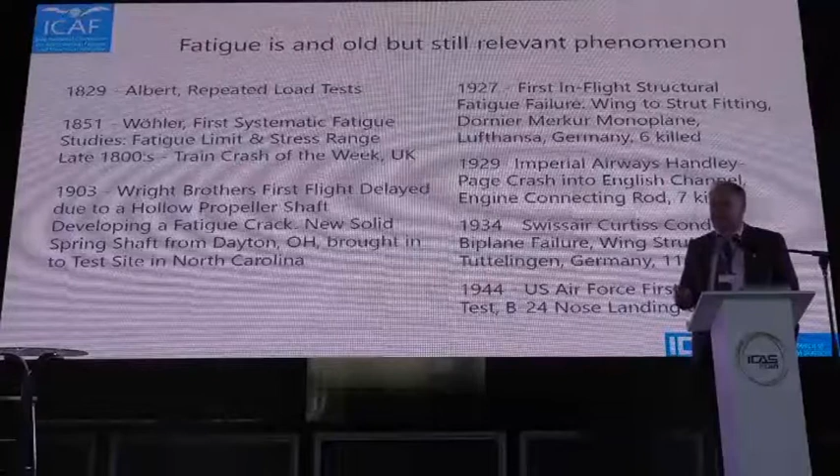On the right-hand side, you see a number of failures. The first in-flight structural fatigue failure occurred back in 1927, and after that, lots and lots of failures occurred. In 1944, the first US Air Force fatigue test was done.

A very famous failure occurred in the early 50s by this plane, which was the first serious jet operating at high pressure, so it could fly at high altitude. Therefore, it had a number of unique features, such as twice the internal pressure compared to any other plane at the time. This particular one, called Yoke Peter, was delivered in '52, and about 2 years afterwards, it failed and fell down. It was flying from Singapore to London, had landed in Rome, and then crashed outside the island of Elba at about 150 meters.

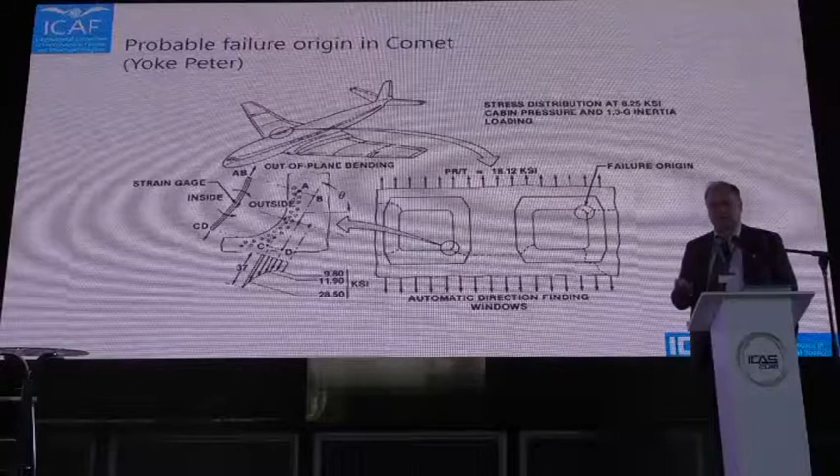Then they tried to recover the pieces from the first failure and started to do fatigue tests. It was soon realized that fatigue cracks did happen, and they came at the corner on this window, which was used at this time to navigate after the stars at night. So basically it was understood already at this time that cracks initiated due to the new very high pressure and stress concentrations. Later on, it has also been explained that there was lots of secondary out-of-plane bending due to curvature of the fuselage, which added to that. So the main effect here was basically to realize the importance of stress concentrations.

Early on, a number of important contributions to our field were the development of the closed loop servohydraulic test system. That's the best we have, the full-scale fatigue test. A little bit similar to the wind tunnels in the aerodynamics community.

Fracture mechanics started to be used in the 60s and 70s to model fatigue crack growth. It's interesting to note that the first paper by Paul Paris was rejected in 3 leading journals. The reason was that people felt there is no way that a phenomenon like fatigue crack growth, which includes material separation and therefore plastic deformation, could be modeled by a linear elastic fracture mechanics parameter.

However, now it's very well understood that as long as we have what is called small-scale yielding, which we normally have at the lifetimes we operate, the stress field at the crack tip is characterized by the first term in the series expansion. This is called the stress intensity factor, and it has an inverse square root singularity. So the stress goes to infinity at the crack tip, but of course yielding will stop the stress from becoming infinite. The good thing is that it's not dependent on planar geometry, so we can transfer data from test specimens in the lab to the structural calculations we do for real aircraft.

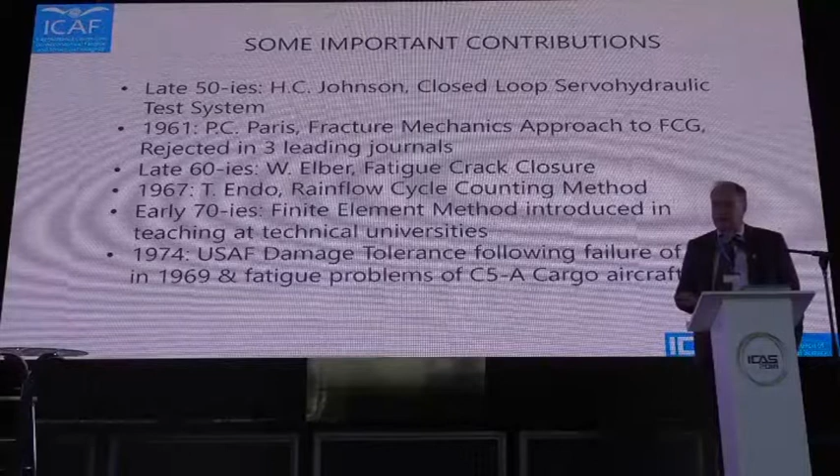Finite element methods started to be used in the early 70s, and they are our bread and butter today to analyze stresses. In 1974, the US Air Force introduced the damage tolerance concept following two failures of the F-111 in '69 and fatigue problems of the C-5A cargo aircraft.

I will only show the F-111 here. Originally it was designed for a service life of 4,000 hours and equally many flights, but failure occurred after only 105 hours. This happened on a low bombing mission, occurring at only 3.5 Gs, which is roughly half the design limit, so the stresses weren't that big.

And the reason, of course, you can see down on the lower corner here—sorry, I can't get this right. You see, on the right-hand side, you have an initial flaw prevalent in this steel. It's a D6 steel, already at the beginning roughly 1 inch long. This particular steel is very sensitive to small cracking, so failure occurred very fast.

Eventually, the problem was sorted out, and they did 4 fatigue lives and resumed safe flying. But each and every aircraft had to be tested at minus 40 Fahrenheit before flying, due to the sensitivity to very small flaws. Very expensive.

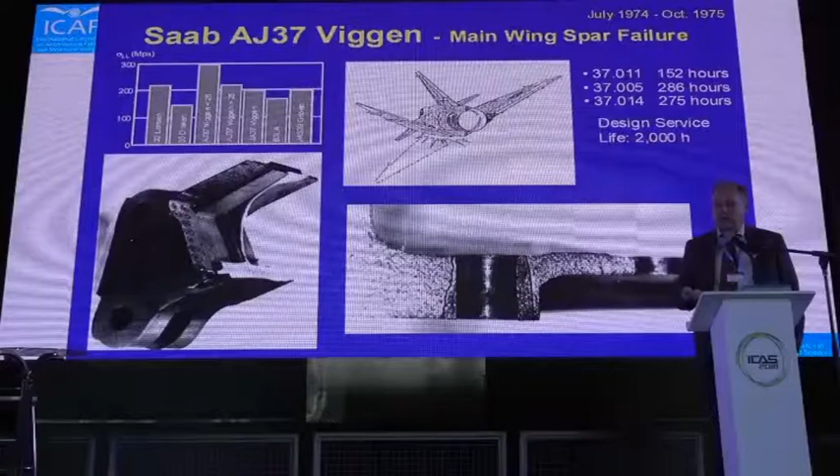We had failures in Sweden also at about this time. These were due to logistical problems—a hole was drilled very close to a free edge, and this was not forwarded back to the stress office. Very simple to analyze when you know, but it's a logistical error.

Another one happened in the late 70s. It's a Boeing 707, which crashed upon landing at Lusaka Airport in Zambia. The design service life here is 60,000 hours, and as you can see, it failed much earlier.

This design is quite interesting. It's only the upper and lower chord which are carrying load. The middle part is a fail-safe design. Normally it doesn't take any load, but once one or the other breaks, the center part can take load, so it's supposed to be a safe, fail-safe design. However, the cracking occurred in such a way that it was not possible to inspect before failure. So what we learned here is that even if you design for crack growth, you must have inspectability.

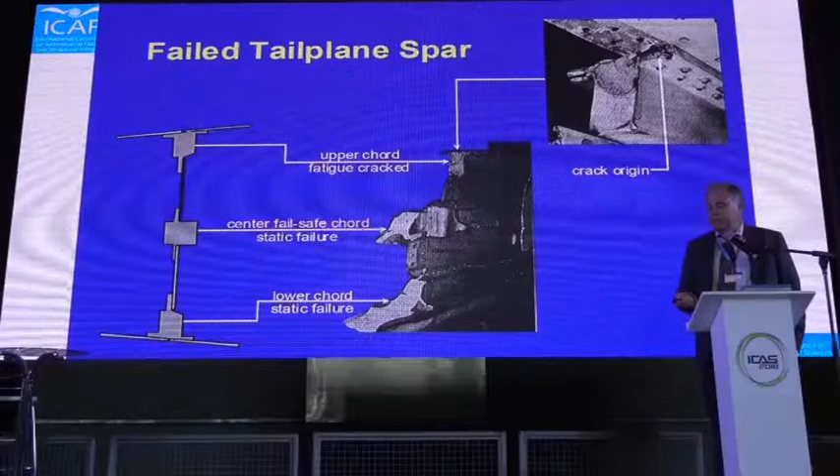In the 80s, which is probably the most important decade in terms of structural integrity growth, there was tremendously good funding available in most countries in the world. We could do lots of basic research in fracture mechanics, fatigue crack growth studies on mechanisms, things like heat treatment, where you change dislocation structure to get planar or wavy slip and so forth.

We did lots of work, especially in Europe, on producing standardized load sequences. Falstaff simulates the loading on a fighter wing, Twist similar for a transport wing, the connection to the fuselage. Helix and Felix are helicopter load spectra. Enstaff is the same as Falstaff with environmental conditions involved to test composites. Carlos is for the car industry. These sequences were produced to make it possible to exchange data around different laboratories, because load sequences typically are classified, so you can't easily exchange data otherwise. I think this is still a very good concept.

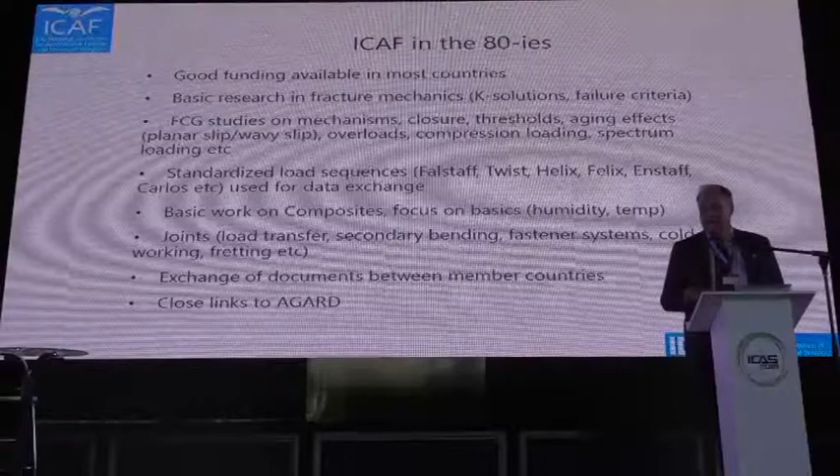We worked very much on composites then, focused on very basic things like the influence of humidity and temperature. Lots of work on joints. This is still very relevant. Joints are one of the more difficult things to design, especially when you have combined metal and composite structure. At that time, we had very close links to what is called AGARD, that was NATO's research and development group at that time. It still exists in a different format, not as successful, I think.

The next failure I want to show happened in Japan. A Boeing 747 crashed because the bulkhead cracked, and you got pressure which tore off the fin and the horizontal tail plane, therefore tearing away all the hydraulic control system.

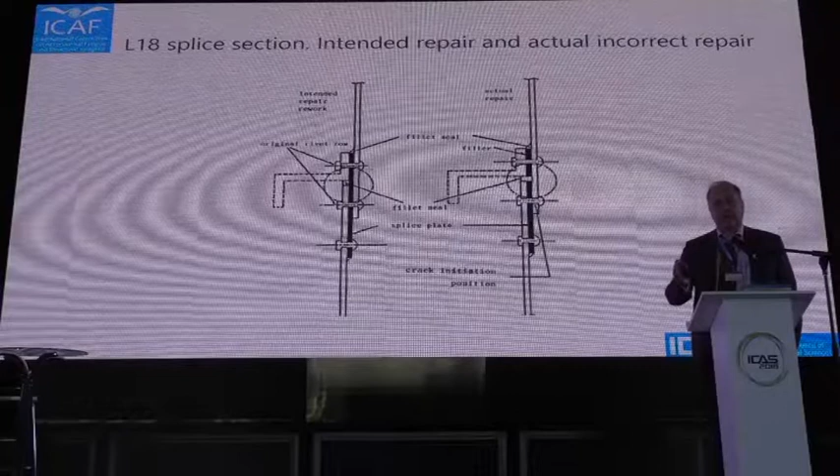The reason for this was that the plane had previously had a very bad landing, introducing damage in this bulkhead. So it was repaired according to what were correct regulations. However, the repair did not occur in the right way. The left-hand side shows what it should have been, the right-hand side shows the actual repair. What happened was a mistake in the middle part, hard to see here, such that you only have one rivet line carrying load in reality, whereas it should have been 2 rivet lines.

So here you see that these 2 bays now, because of the poor repair, have only one single row of rivets, and that has less than 70% load capacity than before.

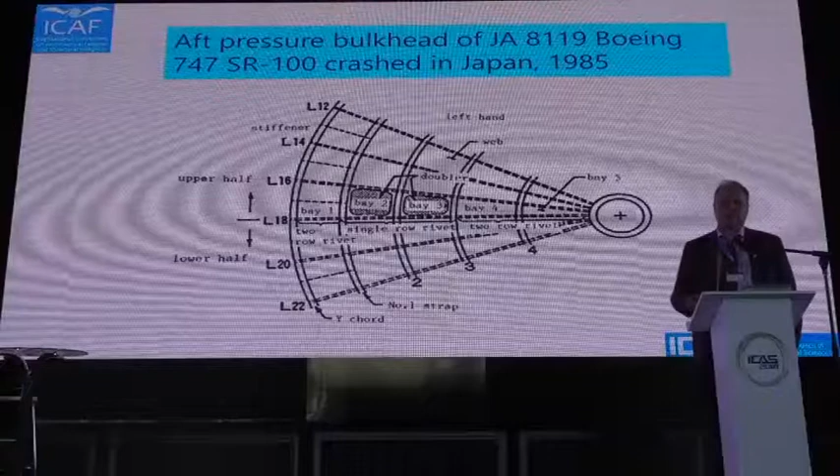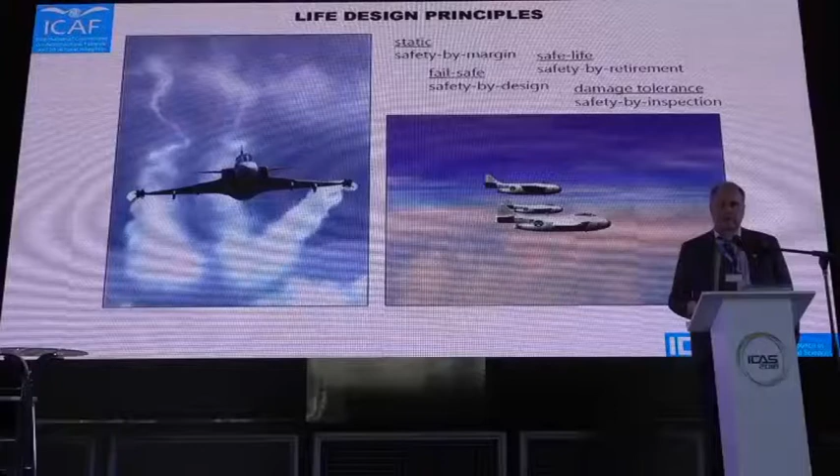Then we went to fail safe, which is safety by design, which is quite tricky. It's now part of damage tolerance design rules, which are really based on safety by inspection. All civil aircraft today are designed for this. Military aircraft, as far as I know, still only in the United States and Sweden.

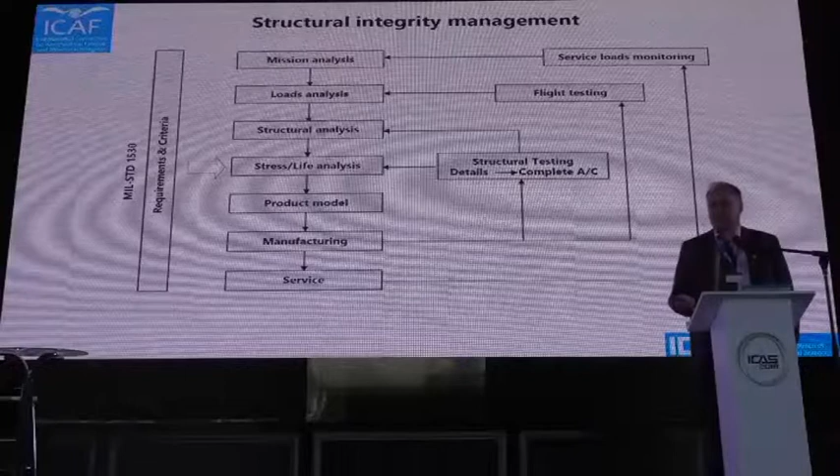Then I have loops. The inner loop is structural testing from details up to complete aircraft. At the same time, we have flight testing, making sure that the initial load assumptions were correct. If they are not, you have to go back and redo the stress analysis, which will influence the test aircraft. And finally, we monitor loads on each and every plane, of course, such that we can optimize the usage, different pilots, mission mix, and so on.

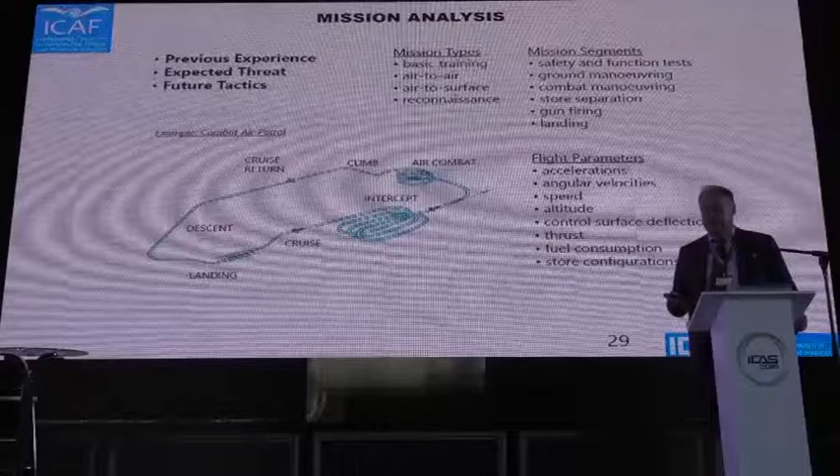So, very quickly, what is involved in mission analysis is clearly previous experience, the expected threat, future tactics. This is for fighter aircraft, of course. Various mission types today, lots of new planes are changing mission types. You have mixed fleets, so you do both reconnaissance, air-to-surface attack, fighter roles, and so on.

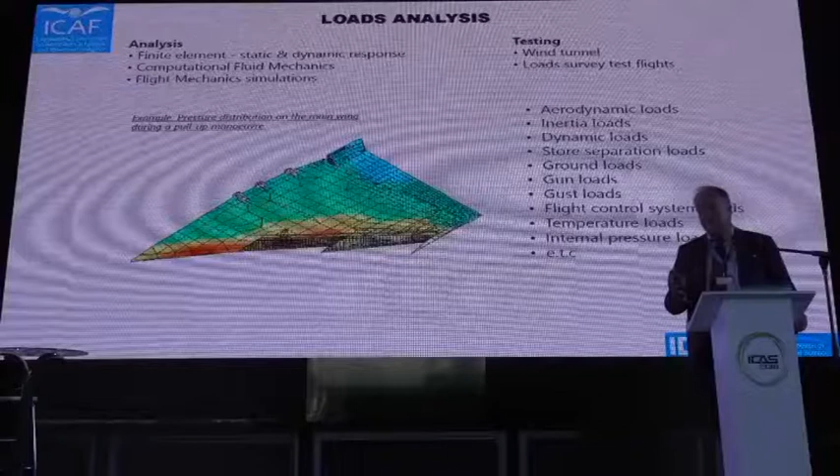When it comes to civil aircraft, the ground-air-ground cycle is very dominant, and we typically design for 60 to 100,000 flight hours or so. For fighter aircraft, the maneuver loads typically dominate the fatigue life, and therefore we have much larger stresses, and lives are in the order of 1/10 of civil aircraft, 6 to 10,000 flight hours or so.

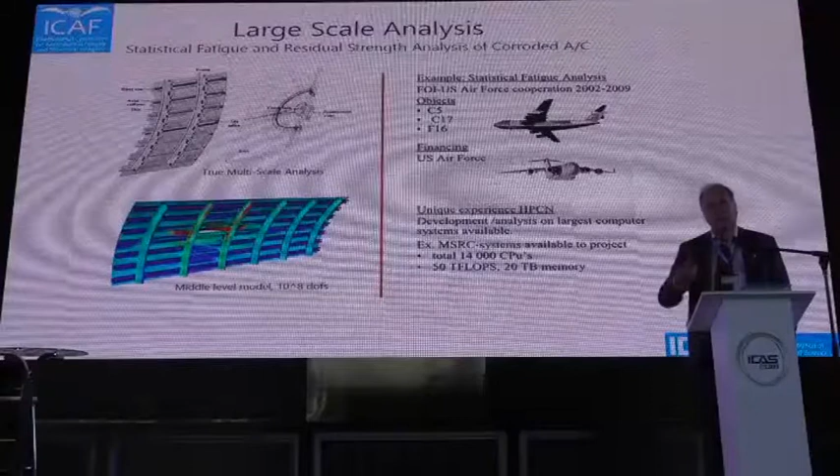I would say that in the commercial world, it's very hard today to compute more than about 100 million degrees of freedom, because the computational codes do not scale with the number of computers. If you do three-dimensional p-version finite elements, you can actually scale this. So we have in fact done what I believe are the largest real computations, up to 7 billion degrees of freedom in statistical modeling. Very complicated, but you can do this extremely well today.

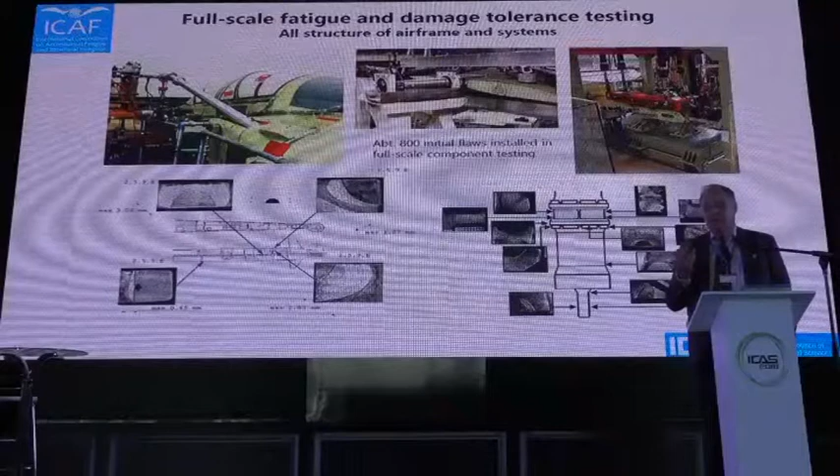Full-scale fatigue and damage tolerance is done for each and every new aircraft. Typically, you do full 2 fatigue lives first, then you introduce flaws at critical locations and do up to 2 more lives, and then eventually residual strength tests.

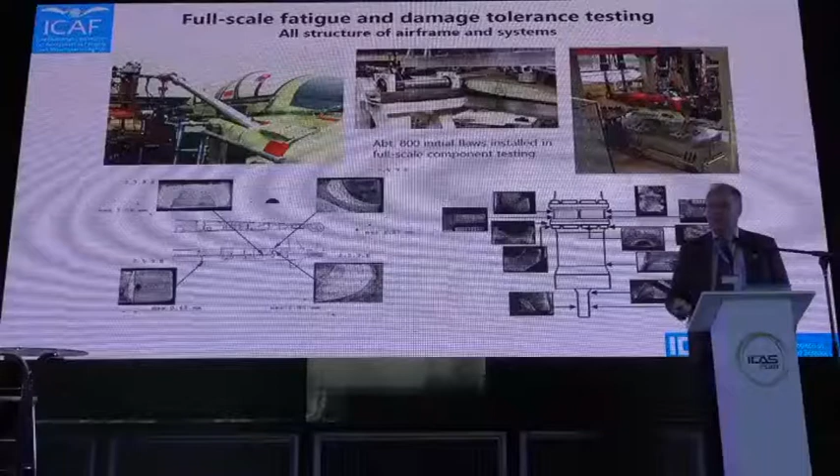This shows work in Sweden for the Gripen aircraft, where you see that about 800 initial flaws were installed in critical locations, and a full-scale test can look like this, typically with 120, 140 load actuators. It goes on for many, many years, and you always want this test to be far ahead the fleet leader out in service, such that we will discover any possible new mechanisms occurring due to design changes or new materials.

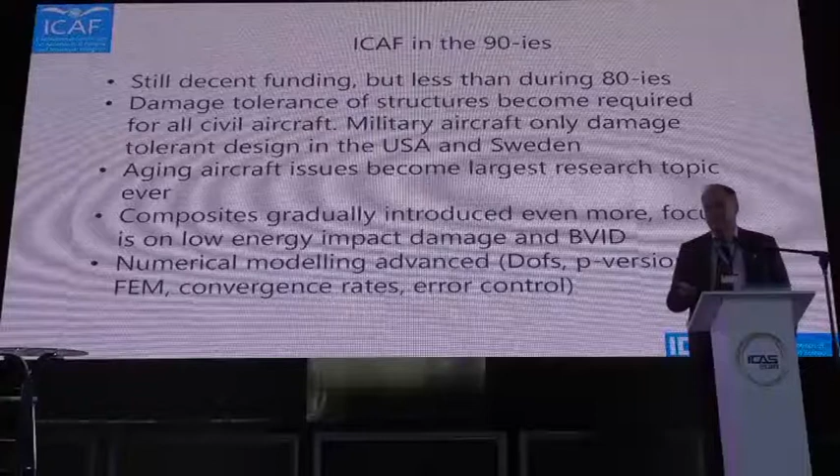In the 90s, we still had decent funding, much less than the 80s, but okay. Damage tolerance and structure became required, as I mentioned, for civil aircraft. Aging aircraft issue became the largest research topic ever in the world. Composites were gradually introduced even more. Now the focus was on low energy impact damage and barely visible impact damage.

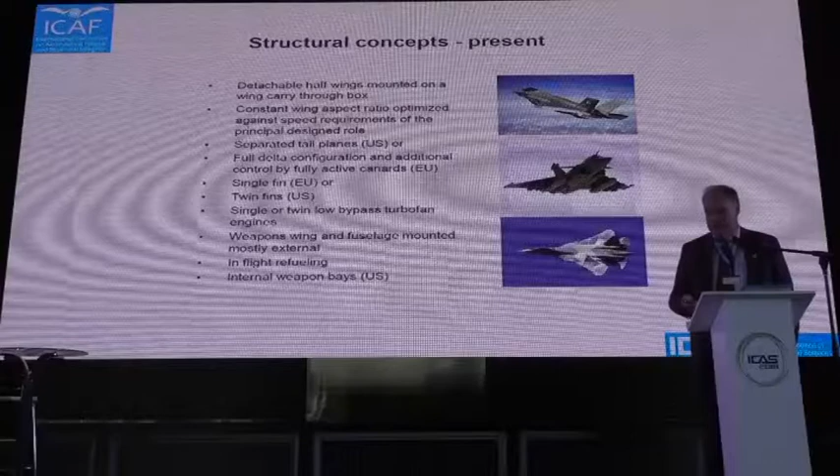When it comes to material, there is a big discussion of composites versus metals. There is lots of gospel at universities saying composites are better, but that's not true, at least not until now. What you possibly benefit from composites is less inspection, and composites are really only important at intermediate thicknesses. You can't use them for very thin sheets, and for thick sections you still prefer metals.

Metals are much better under impact conditions, and that includes battle damage. So for real war situations, I still would go for a metal wing. But in a certain sense, you can use the anisotropic nature of composites to optimize things like lateral deviation, and you could put in sensors for control of damage growth, for example.

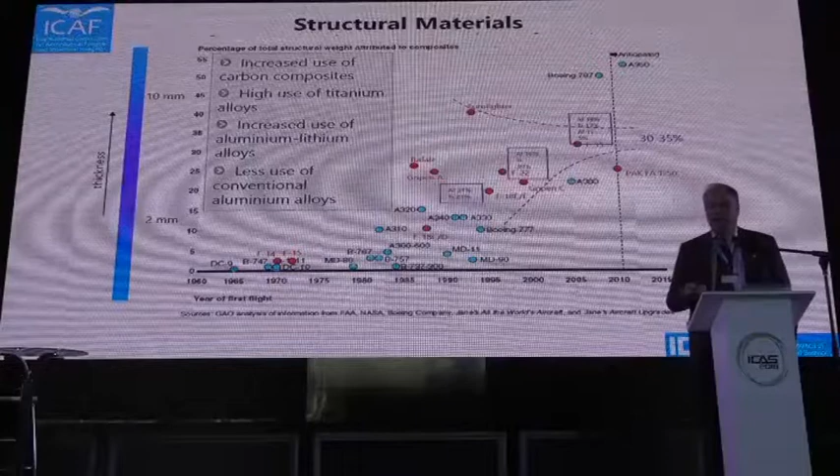This is a chart of how material selection has changed over the years. Today most planes use composites up to 30-35% of the primary structure, but in the next few years, already the Boeing 787 is flying with a pressurized composite fuselage, and the A350 is expected to use even more composites. If you go back, you see this was led initially by fighter aircraft, but now even more so for civil aircraft. Also interesting is that in the 80s and before, we had lots of titanium in fighters. We don't do it anymore for various reasons, but now titanium is coming back as fastener elements. You can't use steel because of corrosion, and you also need it as soon as you have high temperature problems.

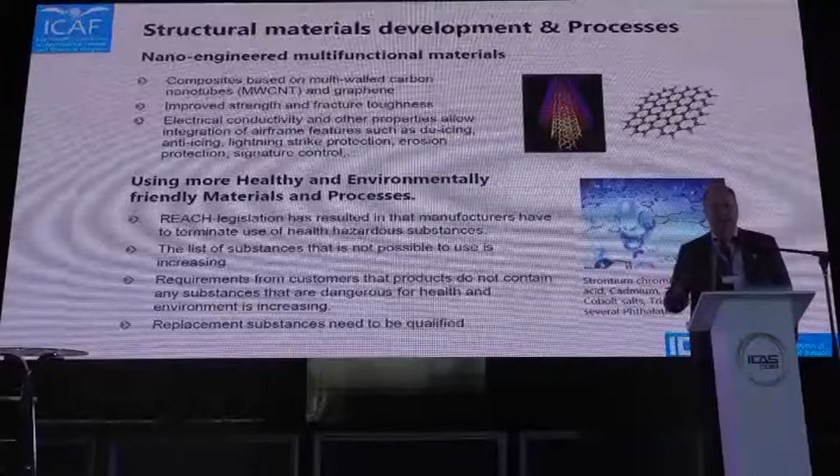New material problems arise as nano-engineered materials are introduced. Again, it's gospel that everybody believes strength and stiffness is important, but you can't scale that easily to structural applications. So what we want is to look at surface properties, electric, electromagnetic, and so forth, whilst maintaining strength and stiffness. The other thing happening now is that due to health and environmental problems, lots of materials used in the past can no longer be used, so we have to look for new materials, and this is extremely expensive.

My final few slides, I want to show what has happened. Every generation of military aircraft, from generation 1 up to 5 now, has become more and more complex. You introduce more and more systems and so forth. Therefore, the planes are much more expensive, and therefore you buy fewer planes.

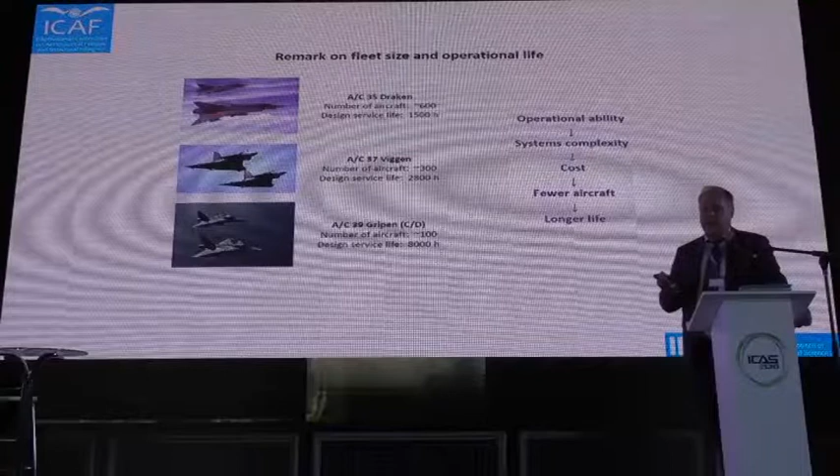The reason is that we need very long lives to train pilots in peacetime, and when you have very few aircraft, you need longer life. Therefore, I would dare to say that for the next generation aircraft, structural integrity is more important than ever, because you want to update these planes. You want to be able to put in new sensors, new avionic systems, new communication suites, and so forth. Unless the structural integrity of the plane is there, you can't do this.

So I have a feeling that at high management level in lots of companies now, they feel that they know structures well enough, and that aerodynamics, flight mechanics, and other things are more important. Maybe not, because there is a load of senior people disappearing from our industry in the next few years.

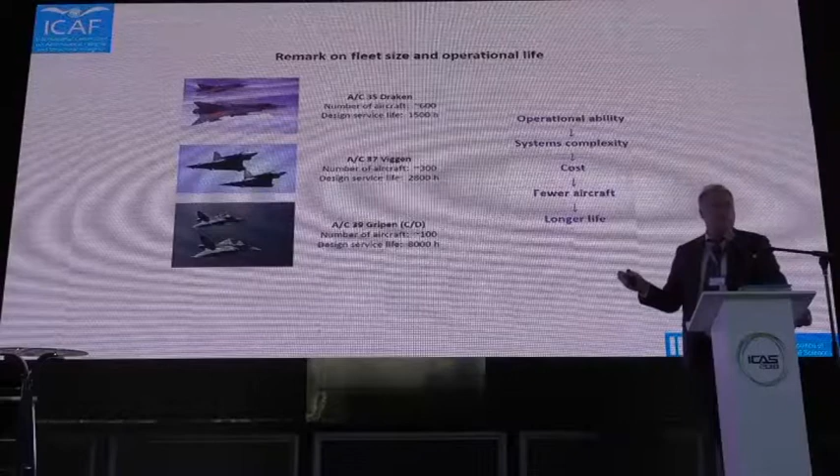And if you look here, what I find is less funding for military purposes, much fewer aircraft projects. There is a risk for losing experience and repeating mistakes from the past. There is an absolute need for knowledge transfer to younger generations, which is very good with conferences like this.

I also see a big risk for trust in huge calculations, despite what I showed, without substantiated input data, load cases, boundary conditions, and structural testing available.

Aeronautics has started to become more and more cost-driven, a little bit similar to the automotive industry, but safety should always come first. I think when you fly back, yes, you're concerned about the price, but more important is that you actually bring home your family.

So that is important. We are starting to look not only on fixed-wing planes, but more and more on helicopters and systems. There are different challenges here. Helicopters are big fatigue machines, of course, and systems have much smaller dimensions, which causes certain problems.

As what it mentioned, we broaden our scope to not only fatigue, but structural integrity, and the reason is, of course, that we already worked on static strength, battle damage, bird impact, corrosion, and so forth.

And we wanted to make sure that the most important aeronautical countries in the world, not yet members of ICAF, became so, and those countries are China, Russia, and Brazil, and will be covered by my colleague in the next talk.

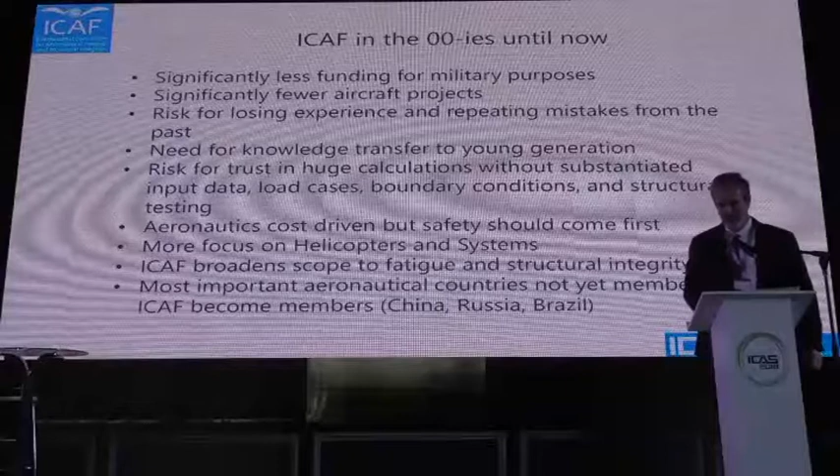In this part of the presentation, I will talk about why the new countries want to join, why they joined actually the ICAF, and the current challenges of civil aeronautics.

I have input from Professor Degang Cui, who is the national delegate from China, and from Dr. Boris Nesterenko, who is the national delegate from Russia. The presentations from China and from Russia, they were kept as received, so I will skip this slide.

The first question that was given to China was why China was interested to join the ICAF. As Professor Cui presented, there is a huge market demand for commercial aircraft in China.

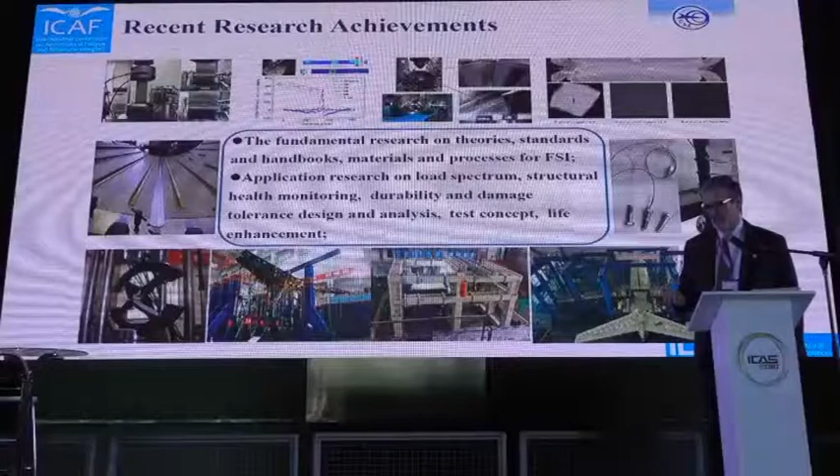In this slide you can see some recent achievements from China in the fields of fatigue and structural integrity. You can see some coupon tests, some component tests, some full-scale fatigue tests, an overview of structural health monitoring activities, and there is an interesting slide on the left with a panel that is fully friction stir welded.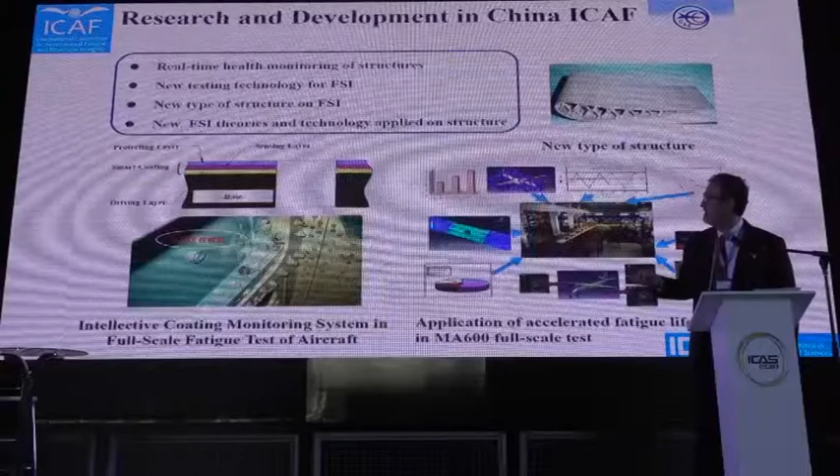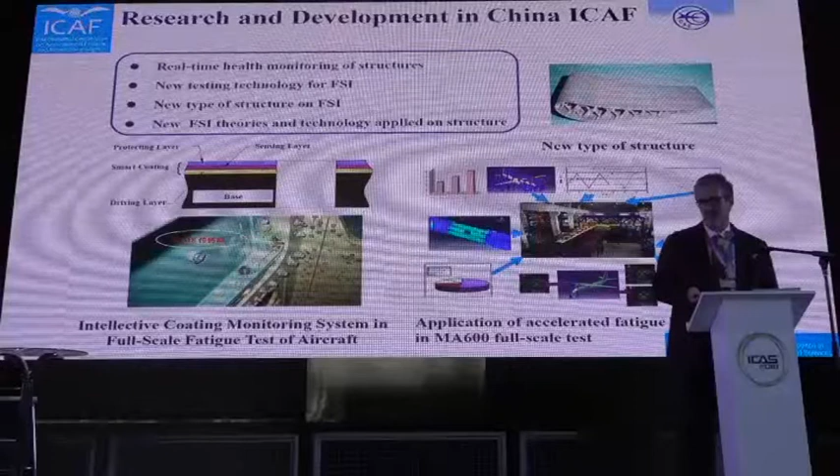Finally, this is an overview of some activities related to fatigue and structural integrity being carried out in China now. You can see some new materials and new processes like additive manufacturing in the top right, and inspection and structural health monitoring and testings for some specific application.

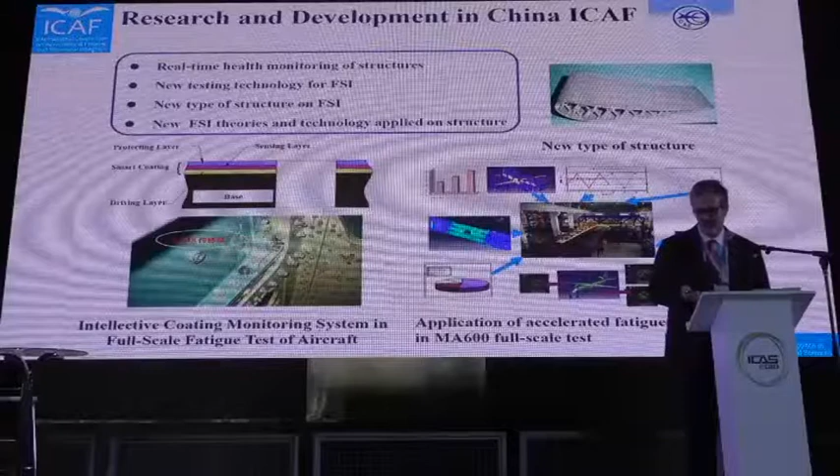Regarding the Russian Federation, the participation of Russian research organizations, academia and universities, jointly with industrial aviation companies in ICAF, is aimed to close the cooperation of scientists, engineers, and aviation specialists in the field of aeronautical fatigue and structural integrity, share of knowledge and experience, and adoption of the best practice and effective solutions.

As most of you know, Russia has a very strong background in aeronautics. They have developed their own requirements. They have a strong background in fatigue theories with statistics background, and they have unique technologies in full-scale fatigue testing. And also, as Dr. Nesterenko emphasized, they have an original approach for aging fleet airworthiness provisions.

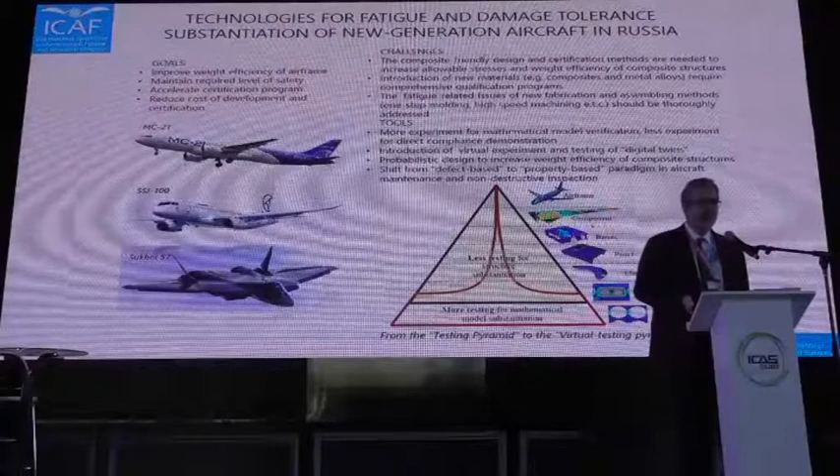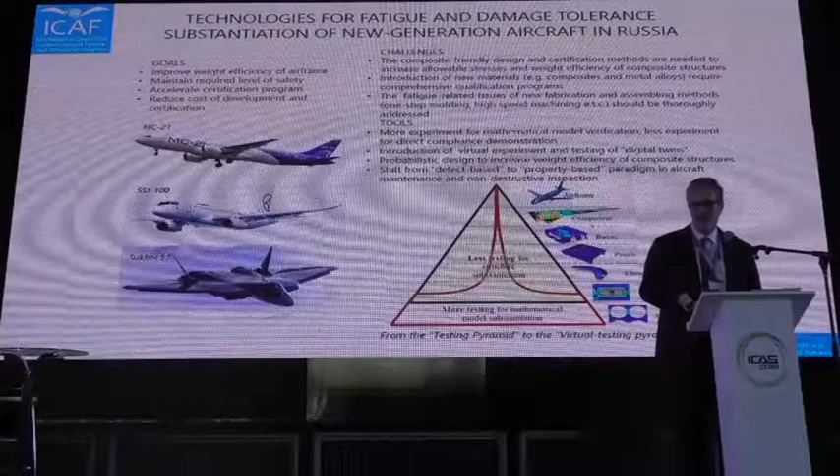Some challenges that Russia is facing now with their new products are regarding composites and probably hybrid structures as well, the introduction of new materials, not only composites but also metal alloys, and fatigue-related issues on new fabrication and assembly methods. Dr. Nesterenko mentioned assembly and production, and after I read his presentation, I agree with him. It's not only material, but also the process you have to think about.

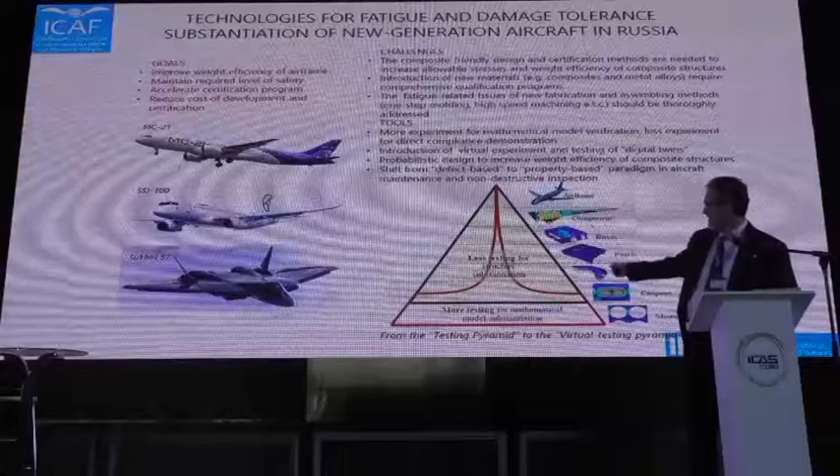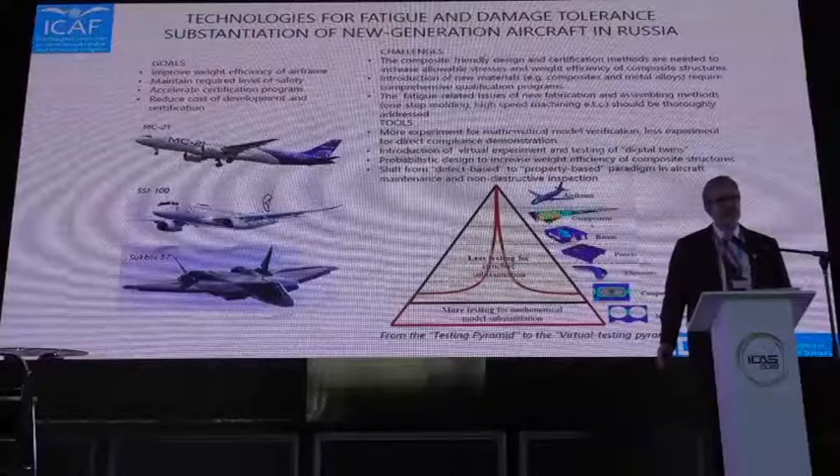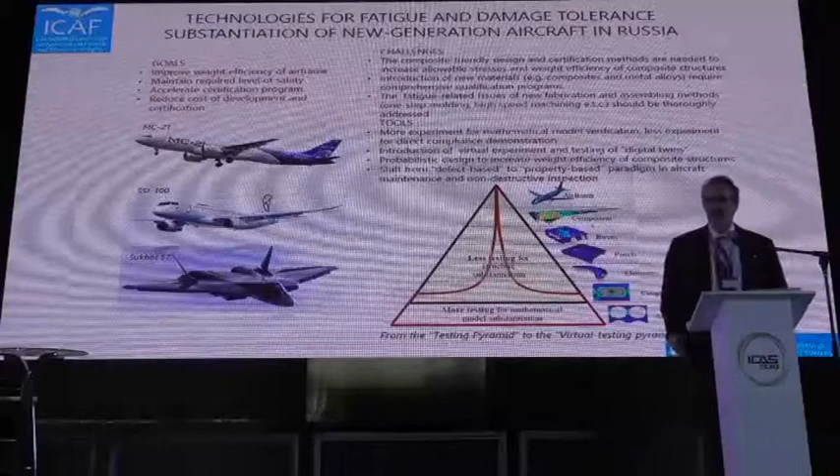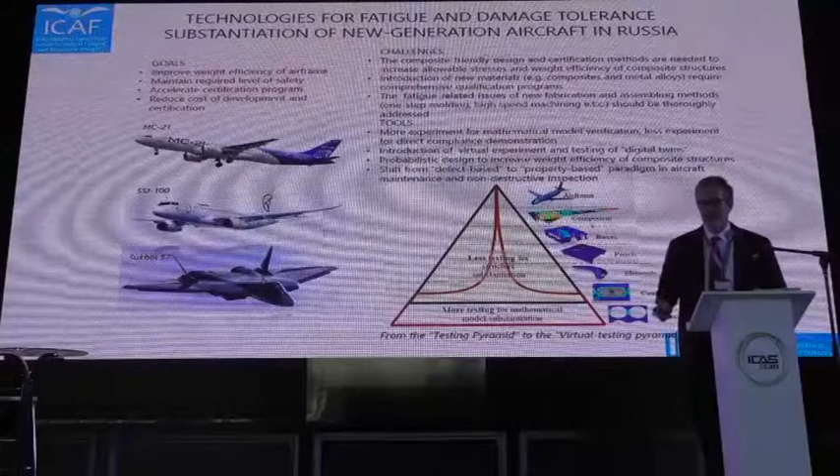And he added this pyramid at the bottom, this building block approach, which I like very much. It shows some recent trends for future product development, that this pyramid is becoming something different, or it will become something different in the future. That is this red line that stands for less tests for high complexity, full-scale structures, and more tests for lower complexity material tests, with a lot of background from statistical behavior of the material.

About Brazil, our participation is being supported by ABCM. I wrote 2015, but actually we were in talks with ABCM, just to remind you, the Brazilian Mechanical Engineering Society that is supporting this event as well. We were in talks with ABCM since 2014, and then we presented two national reviews in Helsinki and then in Nagoya. Following the ICAF directive, we became an ICAF member country in 2017, last year.

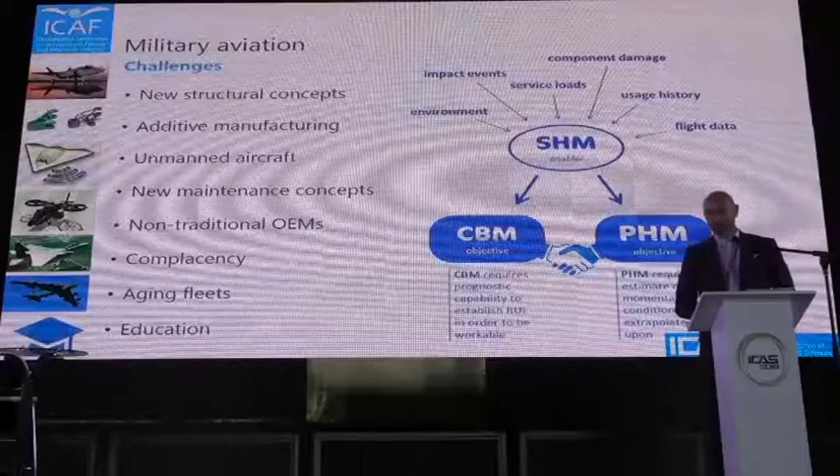And last but not least, education. The technical studies, at least in the Western world, are not that popular anymore. And if people go to a technical university, they go for the buzzwords, the ICT, the gaming, whatnot, not for fatigue.

So there is a risk that we will run out of qualified people in the long run, and in fact that's already happening. Our Air Force in the Netherlands, and I'm quite sure more Air Forces in the Western world will have the problem, has a lack of trained engineers. It's very difficult to attract maintenance personnel at all levels. So there is a challenge there, and this may require automation—AI could fill in part of that gap.

Anyway, those are my observations from military aviation, but the story continues. I think ICAF is still relevant. We're unique, as David already told you. We bring together all aircraft structural integrity stakeholders, and we're very proud of that. Where many conferences related to fatigue address a very specific audience, we bring together all stakeholders, including both military and civil from all over the world. And as I said, structural integrity—the devil is in the detail, don't take it for granted. So we think we have a role there to bring that message across.

We hope that we can contribute to the education of young engineers. We are constantly thinking of new ways to do that. We have a young researchers session in our conferences. Michel Guillaume, the Swiss delegate who's here, developed that idea. We also came up with poster pitches. We have the Jaap Schijve Award for young researchers. Jaap Schijve is my old guru, my fatigue professor. He's still around—he's 92 years old now, still active, not as active as he used to be, but he's there.